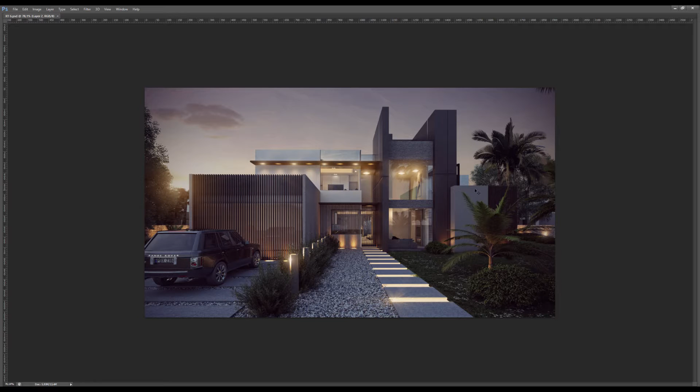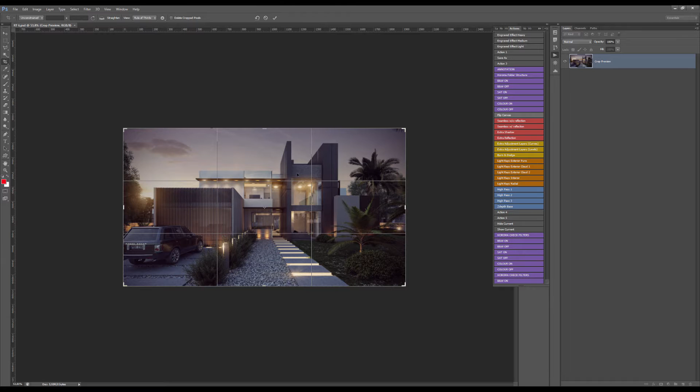One thing I'd like to talk about first is composition. In terms of composition here, it's quite subjective, but still I think we don't have enough sky in here, so I would suggest having it a little bit higher, something like that, and just increase the sky here, because that way you have something that sort of breathes a little bit more. It's kind of subtle, just a couple of centimeters here, but still it's something I think that changes the way you perceive the project.

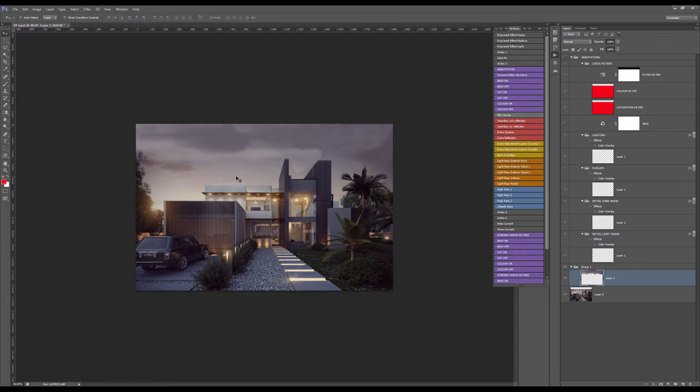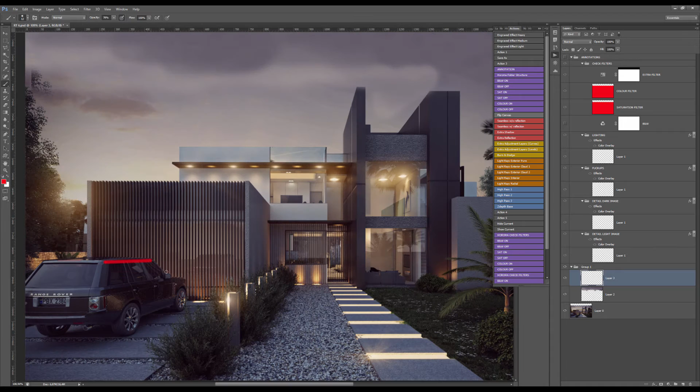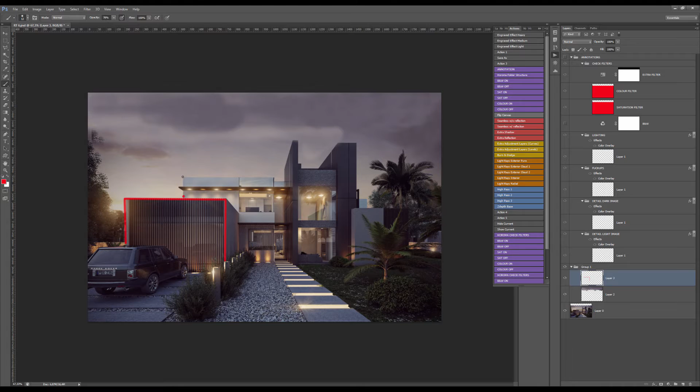One thing that I think is a little bit problematic here is the distortion, because it's not that obvious on the rest of the project itself, although this kind of thing here you might notice it. But when you're looking at this Range Rover here, even though it's a quite long car or truck, you can notice the distortion and feel like this is something like a 25mm lens or something like that. It's a little bit too much. So when you're dealing with frontal views, just be careful with that and try to stay as close as possible to the human eye lens, if I may say. So something around 35mm is something that works quite well.

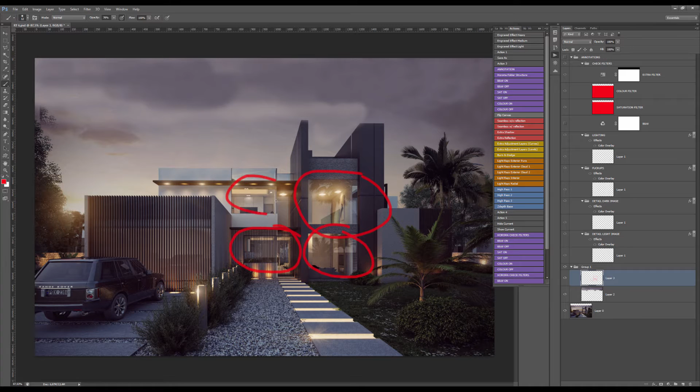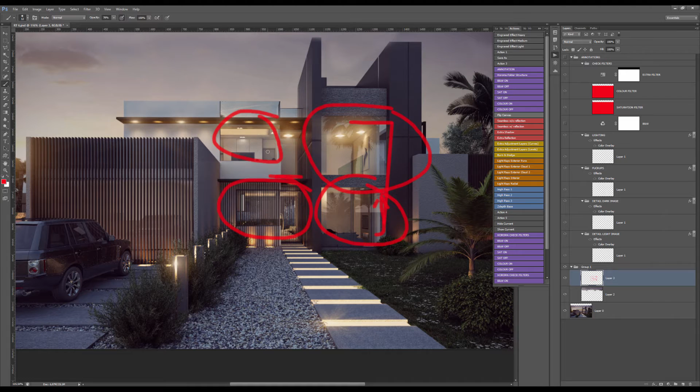In terms of details, what is really working well with this image is that the details of the inside of the building are quite well done. You can understand sort of how the actual house works. This is the living room, this is double height, or I may say you have a stair coming up here, and maybe this might be some sort of a bedroom or whatever, but still you get a sense of how it's used, which is a good thing.

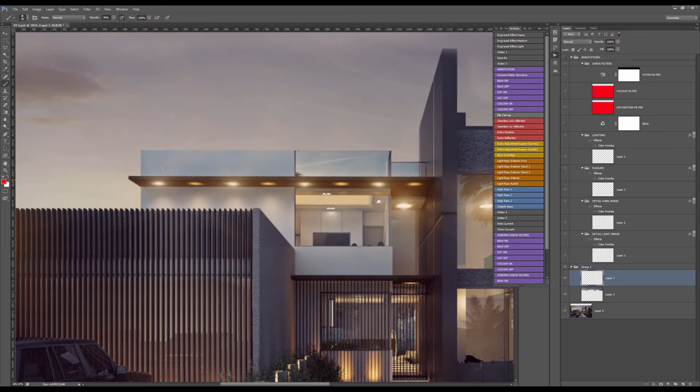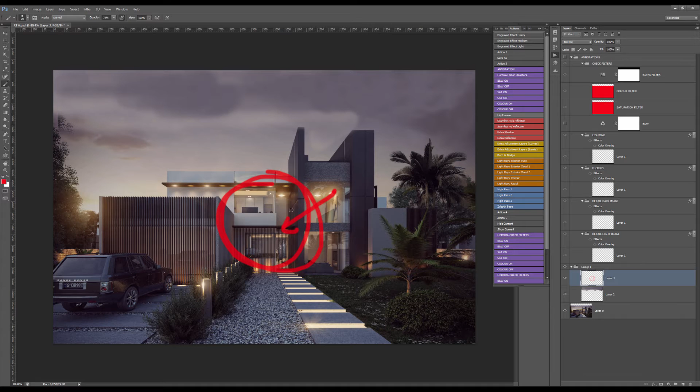I'm a little bit unsure about the artificial lighting. There's a lot of light, which might not be the problem, but these sort of bloom effects here are a little bit overdone - not necessarily overdone, but overdone because they're used everywhere, which is a little bit problematic, because this kind of effect usually only happens at your point of focus, or when you're out of focus, when the light comes into your lens from a too acute angle. So this cannot really happen everywhere in the image, that's something you want to be careful with. It also makes the image a little bit heavier in terms of perception, so you might want to lighten the whole thing, or at least decrease the effect.

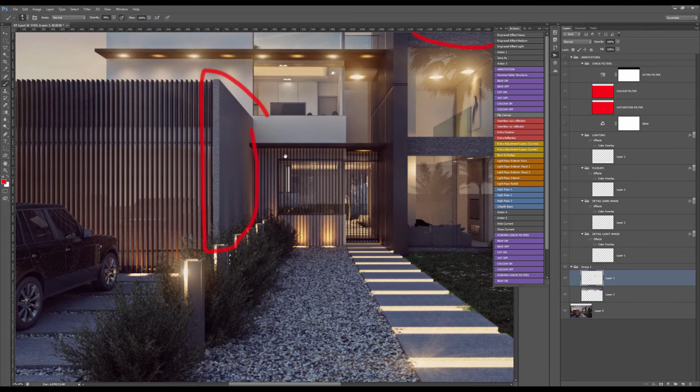Another thing regarding detail, although in terms of modeling it's quite good - these trees, and the foreground pebbles here are quite good - although there's one thing: all the rendering here is basically out of scale. As you can see here, this sort of thing here should maybe be even 5 times smaller or something like that. So from this distance, this should look like some sort of a noise, like just like that. So that's not what we have, which is kind of a problem.

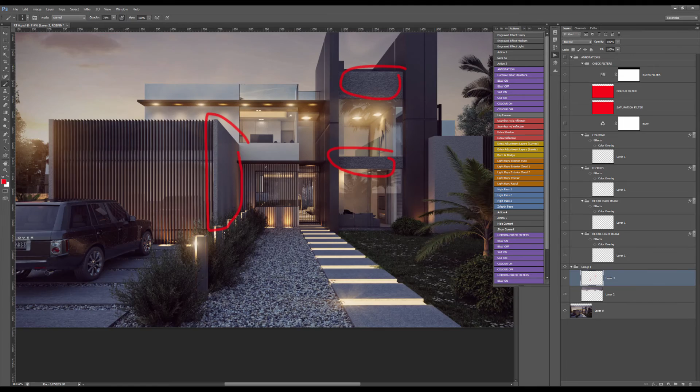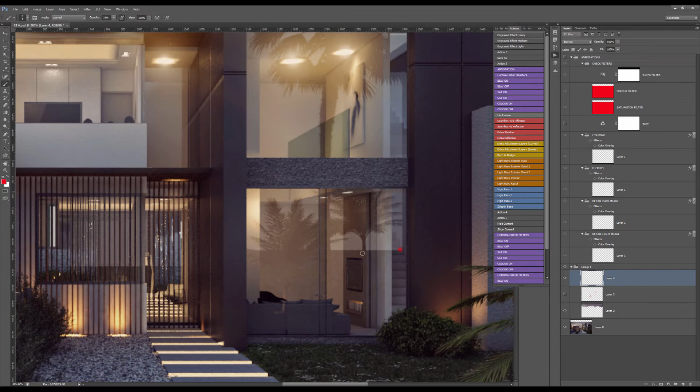Another thing we can have a look at, and I think is problematic here, is that although we're dealing with some sort of HDRI image, it's working well here because we don't see the horizon. But always pay attention, not even just with frontal views, but whenever you're dealing with reflection, always have something on the backside of your image, because as you can see here, this is the horizon of your HDRI image, and we can see it all the way across the building.

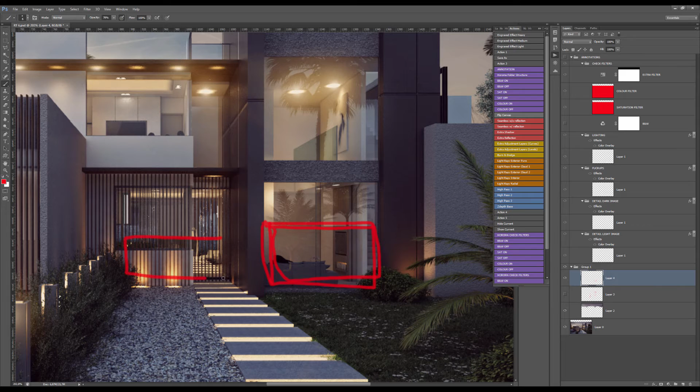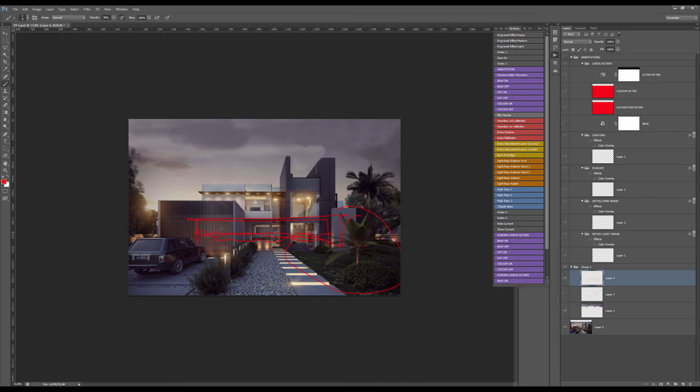The problem with that is, first, it's not realistic, and second, once you don't have the HDRI, it's going to reflect a black area on the whole thing, which is really inconvenient. So always either scatter the vegetation you have behind the camera, or have some photographs of facades, mirror your building, or do something to create some sort of a horizon, otherwise those details will decrease the realism of your reflection.

A couple of things we can have a look at: first, there's a kind of lack when you're in this sort of lighting setup, it's always going to be much more contrast than what we can see here. So it would sort of be like this.

As you can see, it's quite different, and this way it emphasizes the artificial lighting, but at the same time decreases the sort of bloom effect we were dealing with that was unappealing in the end.

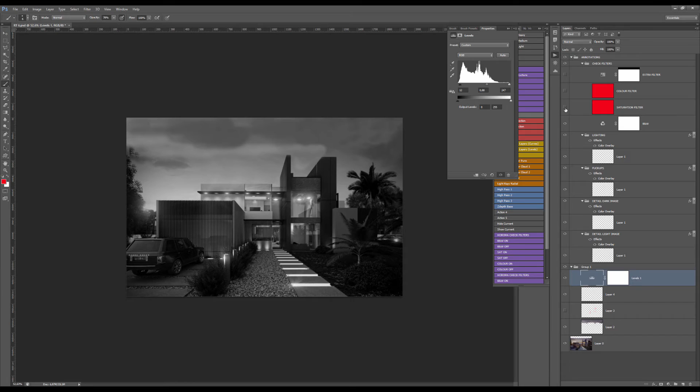Second thing here is more in terms of, well, I'm going to talk about saturation first. In terms of saturation, we have something that is quite good, because when you're dealing with artificial lighting, the artificial light is always going to be more saturated than your natural sky, which is the case here.

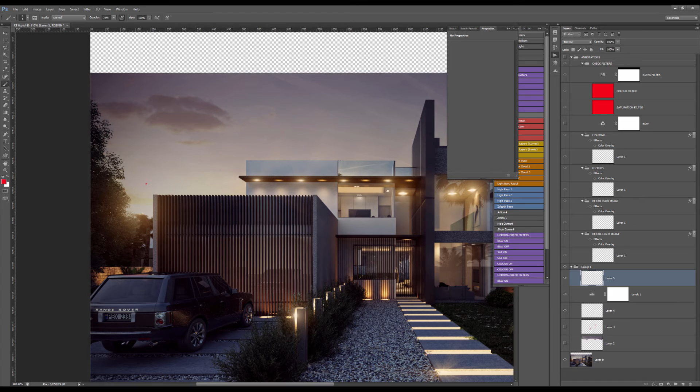Although, if I turn off my... that is weird. Oh yeah, no, that's alright. Although here, something's kind of weird. As you can see, this setting sun is creating some weird saturation - it cannot be like that, you cannot have half of it completely desaturated and the other half saturated. So this looks like something went wrong with the Photoshop work here.

So that's something you need to have a look at. I would recommend changing the sun to something a little bit later in the day, because when you look at the overall colors, nothing stands out except for the inside light. I would recommend having something a little bit more contrasty in the background for the sky.

Second thing as well is that this sort of vegetation, when you're dealing with dusk lighting, is going to change. You cannot get this sort of green light, it's always going to be a little bit more bluish. What am I doing? Something like that, maybe.

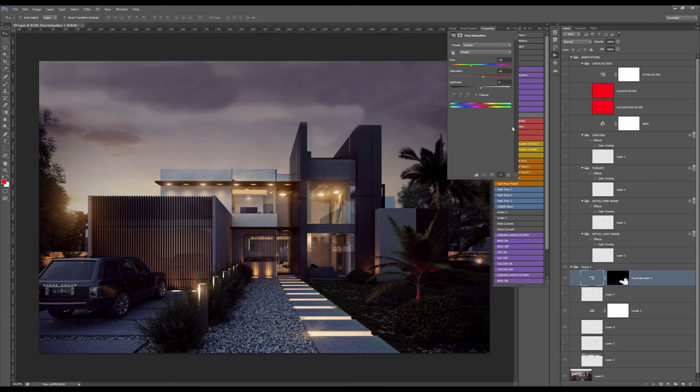So basically always pay attention to how your colors are supposed to switch when you're changing the overall lighting in the image.

I think this is a little bit too harsh there, although it might be okay.

Another thing regarding lighting that can be fun is to always try to get subtle changes in your artificial lighting, because you tend to have different lighting depending on the areas you're dealing with. So say in a kitchen, you're going to have a more bluish or yellow artificial lighting, whereas in a lounge area you're going to have something less crude and more subtle, like orange. This is something you can change, having really subtle changes in the way the artificial lighting evolves throughout the different spaces.

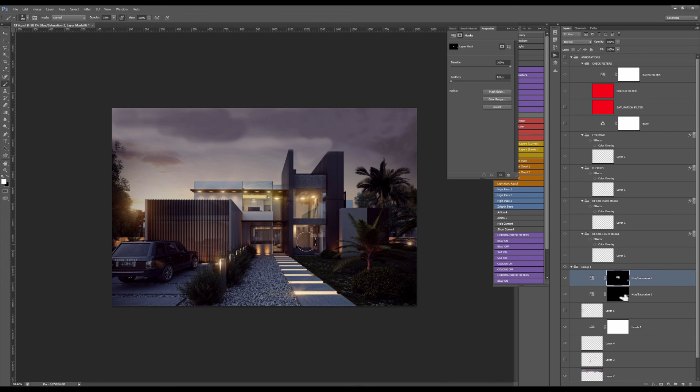It can be the same happening with your exterior lighting, so yeah, just a matter of the temperature. I think there's not much else to say.

As you can see, it's not much of a change, but it's still interesting, and there are a couple of things I couldn't really do. I think it's just a matter of changing the sky, having a bit of detail change in the horizon, and that'll be it.